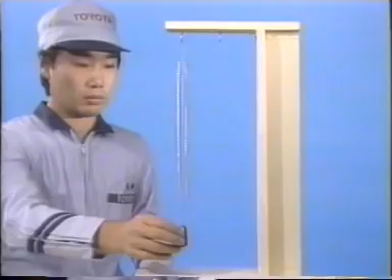In this video, we will learn about the principles of noise and vibration generation and how to troubleshoot NVH problems step by step. We will use simple models to demonstrate the nature of vibration, which just means the rapid oscillation of an elastic solid or fluid. The number of such periodic movements, or cycles, per second is called the frequency. Frequency is expressed by the unit hertz. For example, 1 hertz is equal to 1 cycle per second.

These systems, each consisting of a weight and a spring, are called vibrating systems. Now we will put another lead sinker of the same weight as the first on a second, stronger spring. You will notice that the weight oscillates faster on the stronger spring than on the weaker spring. This time, we will put 2 weights on one spring and 1 weight on the other. Both springs are of the same strength. You will notice that the lighter weight oscillates faster than the heavier weight.

When you compare these vibrating systems, you will find that the frequency of the vibration varies depending on the strength of the spring and the heaviness of the weight. The frequency at which a particular system oscillates or vibrates is called the natural frequency of that system. Now, we will do some experiments using a vibrating system consisting of a spring and a weight and an electric drill. The spring and the weight are now oscillating at the natural frequency of the vibrating system.

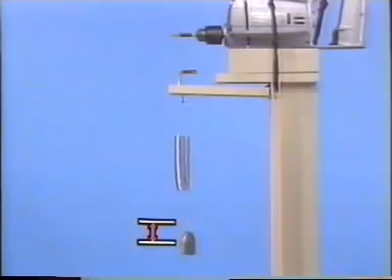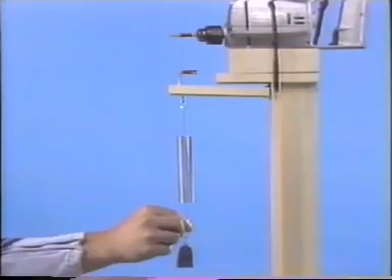Now, let's see what will happen when this drill rotates at a speed that is different from the natural frequency of the weighted spring. You will notice that turning on the drill reduces the amplitude, or size, of the oscillation of the spring. Now, we will increase the speed of the drill until the frequency of the oscillation that it produces reaches the natural frequency of the vibration system. You will notice that the amplitude of the oscillation increases.

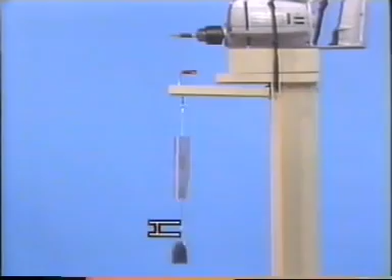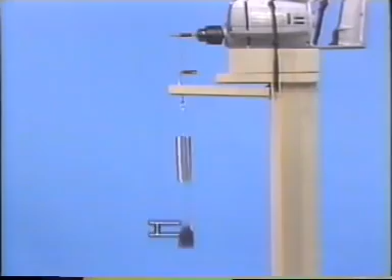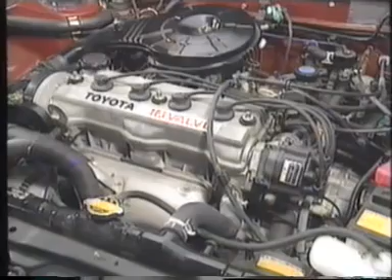When a system is vibrating at its natural frequency and a vibration of the same frequency is added to it, the amplitude of the vibrations becomes larger. This phenomenon is called resonance. The source of a vibration, such as the electric drill in this example, is called a vibrating force. A vehicle has a number of components that can be vibrating forces. We will show you some of them now.

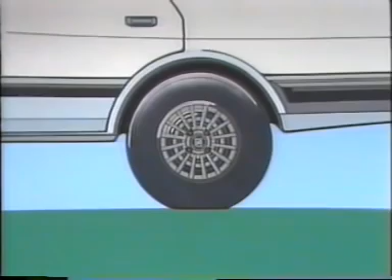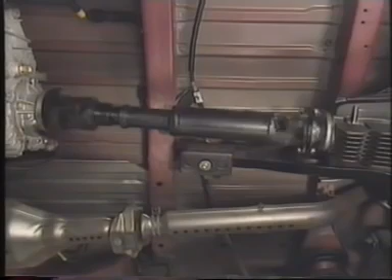When a car is parked in the same place for many days or weeks, there will be a flat spot at the bottom of the tire. This flat spot will cause the wheel to vibrate each time the tire turns. This can, in turn, cause the body of the vehicle to shake. An unbalanced propeller shaft also causes vibration each time it turns. This can cause a droning or humming noise called booming, as well as vibration when the car is running at a high speed.

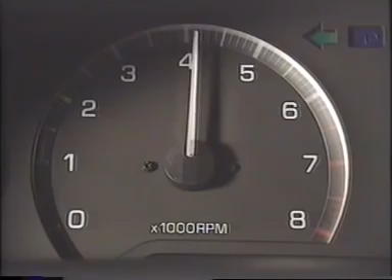The engine, too, is a major source of vibrating force. The torque fluctuations due to combustion in the engine create a vibrating force. This may also cause booming. We will now study the mechanism by which these vibrating forces lead to vibration and noise. For this purpose, we will study how the engine causes booming. The owner of this car complained that booming is heard when the engine is running at about 4,000 RPM.

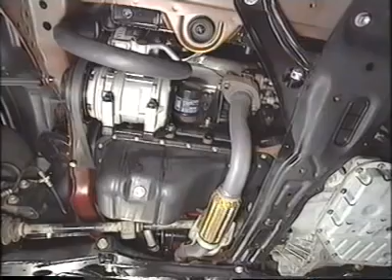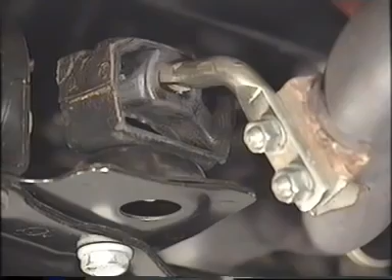The engine vibration causes the exhaust pipe to vibrate. The vibration of the exhaust pipe is transmitted to the body if the exhaust pipe support is not fitted correctly. The body begins to vibrate, causing the air to vibrate also. This vibration is heard in the form of sound or booming by the driver.

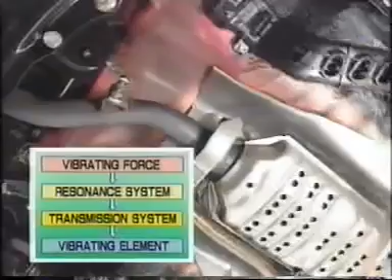Let's sort out the elements of the mechanism of this booming. In this case, the engine vibration is the vibrating force, and the exhaust pipe forms a resonance system. The exhaust pipe support forms a vibration transmission system, and the body is the vibrating element.

The vibrating element causes the air to vibrate, and the vibration of the air is transmitted to the driver's ears as the booming. Sorting out the various elements of a problem is very important for troubleshooting, and you should always analyze problems in this way.

Vibration and noise can be prevented, as we will see next. Generally speaking, vibration can be prevented if you eliminate one of the elements in the mechanism of vibration. If you eliminate the vibrating force, the resonance system, the vibration transmission system, or the vibrating element, you can minimize vibration.

A variety of designs are incorporated into an automobile to prevent or minimize vibration. Let's review some of the designs that are aimed at attenuating the vibrating forces. The vibration of the engine, due to the reciprocating movement of the pistons, for example, is prevented by the use of balance weights on the crankshaft.

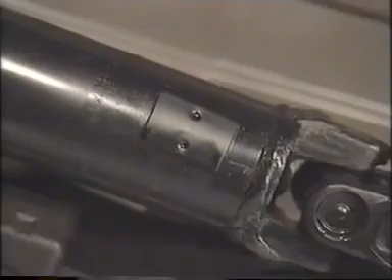The propeller shaft, the tires, and other components that turn at high speeds must also be well balanced. A wheel balancer is used to balance the wheels when new tires are installed. All of these measures are aimed at attenuating the vibrating forces.

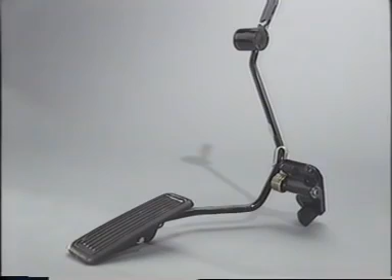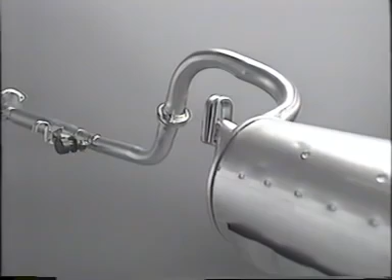A second way vibration can be prevented is by eliminating resonance. A weight is sometimes attached to the accelerator pedal to change its natural frequency in order to prevent resonance. This type of weight, that is, one that is attached directly to a vehicle component, is called a mass damper. When a weight is attached to a component indirectly via a rubber pad or cushion, it is called a dynamic damper.

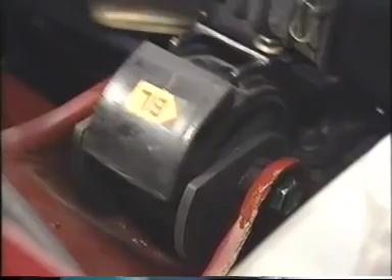The third way to prevent resonance is by modifying the transmission system. For example, rubber or other vibration-suppressing material is inserted between the engine and the body to prevent vibration from being transmitted to the body. Rubber O-rings are also used between the exhaust pipe and the body for the same purpose.

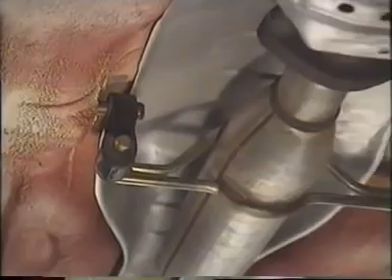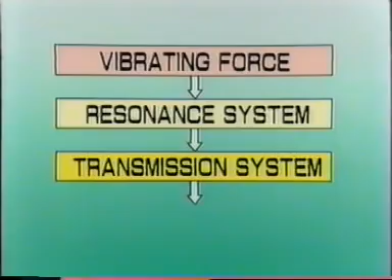The fourth way to prevent vibration concerns the vibrating element itself. For example, the floor is covered with asphalt sheeting, or resin sheets are inserted between steel panels to suppress vibration. These panels are called sandwiched damping panels.

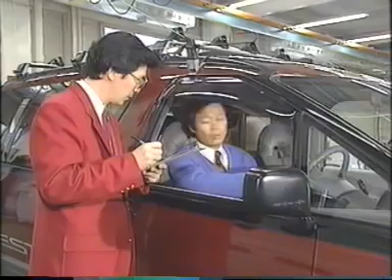As you can see, the principles of vibration are not so difficult to understand after all. Now, based on these principles, we will study how to troubleshoot NVH problems. An important thing in troubleshooting is to forget all your preconceptions about vibration and to listen to and analyze the customer's complaint accurately and objectively. A diagnostic chart may be helpful.

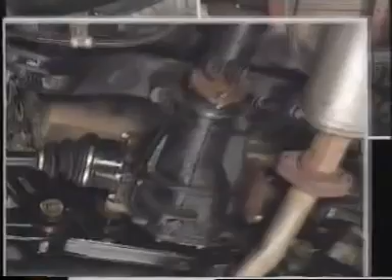If possible, you should also get into the car with the customer, test drive the car, and confirm the problem in some detail. More importantly, you should find out the vehicle speed and engine speed at which the problem occurs, as well as other relevant factors, and identify the characteristics of the vibration and noise as accurately as possible. When you have all the necessary information, it should not be too difficult to identify the source of the vibration.

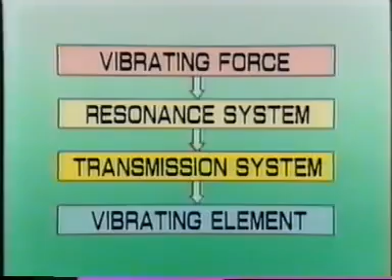In addition, you should sort out all the elements of the mechanism of the vibration and noise and decide which element you need to remove in order to suppress them. We will now study actual troubleshooting using two cases as examples. One of the two cases concerns body shake. The first step of troubleshooting is test driving the car to confirm the phenomenon. You need to know the relationship between the body shake and the vehicle speed.

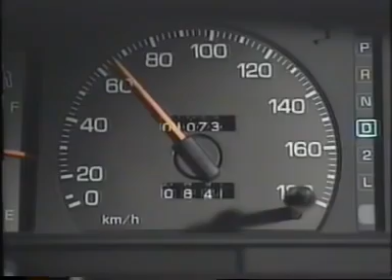In this case, you first begin to notice vibration when the vehicle speed rises to approximately 80 kilometers per hour, and the vibration increases as the speed increases to between 90 and 100 kilometers per hour. You also need to know the relationship between the body shake and the engine load. You accelerate, cruise, and decelerate the car repeatedly, but the vibration seems to be unrelated to the engine load.

The shift lever position and the engine speed often have effects on vibration. In this case, the shift lever position and the engine speed seem to be unrelated to the problem, as the vibration is still felt when you move the shift lever or change the engine speed.

Now, let's summarize all the test results. The test results indicate that the engine load and the engine speed are not related to the problem. The shift lever position is also unrelated to the problem. You can now conclude that the vibration is not caused by the engine or the transmission. So we need to look for some other factors.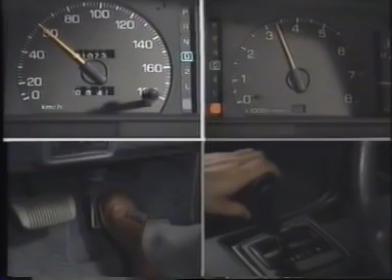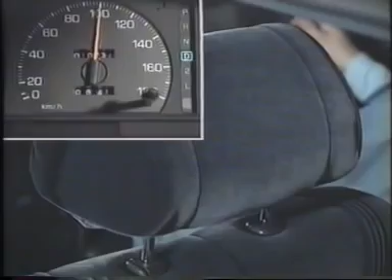We know that the vibration increases as the vehicle speed increases. It appears then that you should suspect a component whose rotational speed increases as the vehicle speed increases. It could be the propeller shaft, the differential ring gear, the drive shafts, or the tires, or some combination of these. The next step is to find out exactly which of these components is responsible for the problem.

There is a good way to identify this component. Since any of these components could generate a vibrating force, let's calculate the frequency for each component at 100 kilometers per hour. We will begin with the tires. The rotational speed of a tire per second is calculated according to this formula.

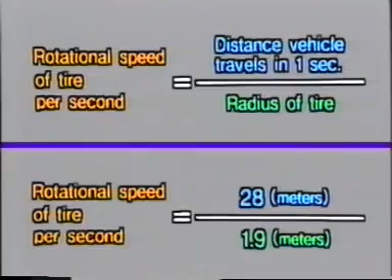When the vehicle is running at 100 kilometers per hour, it travels 28 meters in a second. Assuming that the radius of the tire is 0.3 meters, the tire circumference will be 1.9 meters. Therefore, we can conclude that the tire turns 15 times per second. If a tire has become unbalanced or run out, it will cause a 15 Hertz vibration. The same can be said about the drive shaft or the differential ring gear.

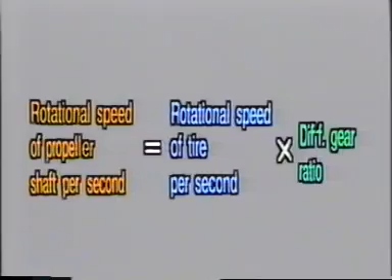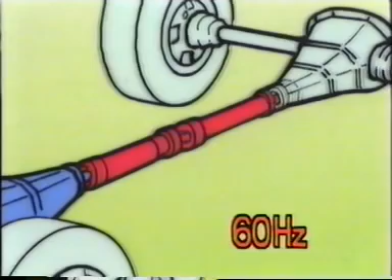What about the propeller shaft then? The rotational speed of the propeller shaft is calculated according to this formula. As you remember, the tire turns 15 times per second in this case. Since this vehicle has a differential gear ratio of 4:1, we can draw the conclusion that the propeller shaft turns about 60 times per second. For this reason, if the propeller shaft is unbalanced, it will cause a vibration at the frequency of 60 Hertz.

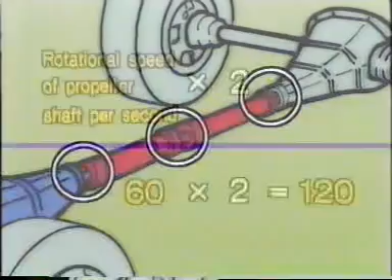In addition, if the propeller shaft has an excessively large joint angle, it will cause 2 excessively large torque changes per rotation. This will cause vibration at a frequency of 120 Hertz, or twice that of the propeller shaft. As you will realize by now, you can identify the vibrating force if you know the frequency of the vibration about which the customer is complaining.

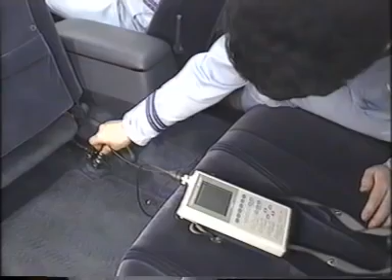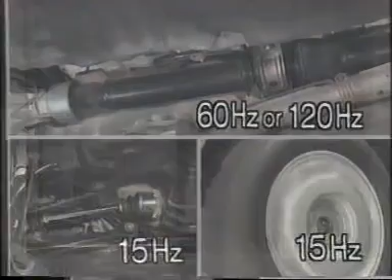A vibration frequency analyzer is used to measure the frequency of a vibration. A vibration frequency analyzer has a pickup probe which is attached to the vibrating part in question. The frequency of the vibration is indicated on the analyzer. You can read the measurement by moving the cursor on the screen. In this case, the frequency reading is 15 Hertz. This indicates that the vibrating force is generated by the tires, or by other components that are turning at the same speed as the tires.

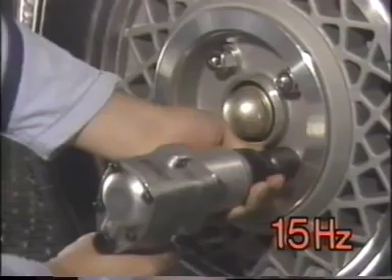If a vibration frequency analyzer is not available, there are other methods that you can use to estimate the parameters of a vibration. All you need is your hand and an intuitive knowledge about the most commonly occurring frequencies. For instance, this component is vibrating at a frequency of 15 Hertz. If you touch it with a screwdriver, you can hear and feel it quite easily. An impact wrench generates vibrations of a similar frequency.

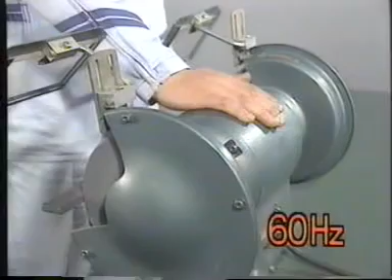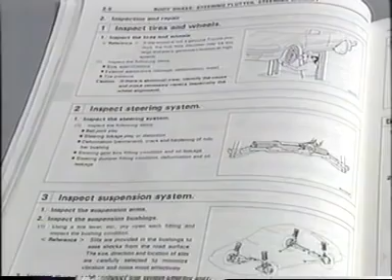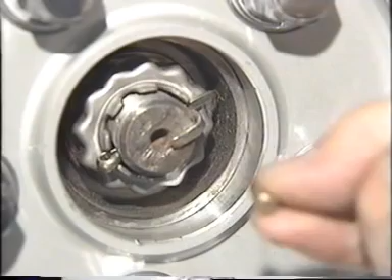Now, we will return to troubleshooting the problem of vibration at 15 Hertz. We will start with inspecting the tires, because tires often cause body shake at high speeds. We will refer to the NVH diagnosis manual as we inspect the tires. Before we begin the inspection of the tires, we must check the tires and wheels visually, the steering linkage, the suspension system, and other related components. If everything is normal, we check the clearance between each hub and wheel. The standard clearance is less than 0.1 millimeter. This wheel seems okay.

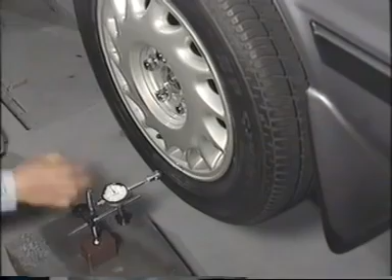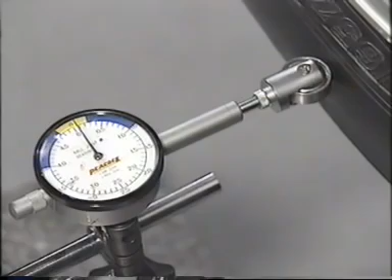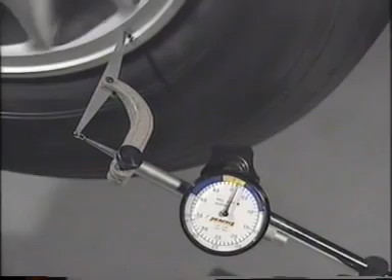We will check the tire runout next. Before doing this, be sure to drive the car for about 15 minutes to eliminate the effects of any flat spots. The maximum allowable lateral runout is 1.2 millimeters. This tire seems okay. Let's check the radial runout next. The maximum allowable radial runout is 1.0 millimeters, but the reading here is much larger than that. This could be the cause of the vibration. Let's check the radial runout of the wheel also. The wheel runout is not zero, but it is within specification.

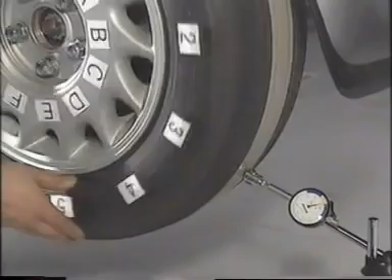In a case like this, the radial runout can be corrected by conducting phase matching between the tire and the wheel. If you move the thickest part of the tire to the point where the center of the wheel is closest to the rim, the radial runout will be reduced. This procedure is called phase matching. As you can see, the runout has been reduced. To phase match the tire and wheel, we divide the tire into 12 equal divisions like this. Then, before starting the measurement, set the dial gauge to 0 at location 12. Next, record the amount of runout at each point.

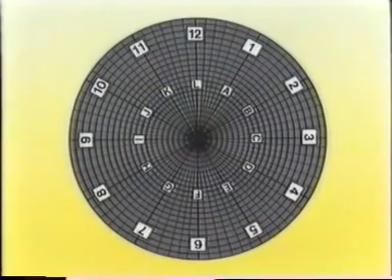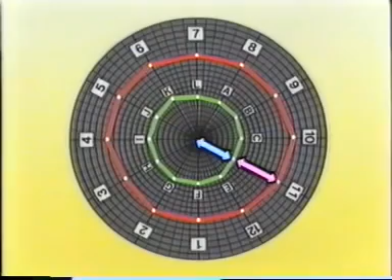The result will look something like this. The outer line indicates the radial runout of the tire, and the inner line indicates the radial runout of the wheel. As we said before, if you move the thickest part of the tire to the point where the center of the wheel is closest to the rim, the radial runout will be reduced. Let's check the results of the phase matching. The measurement now reads well below the standard value of 1.0 millimeters. You need to do a similar check for all of the other tires.

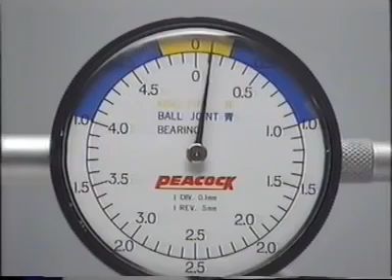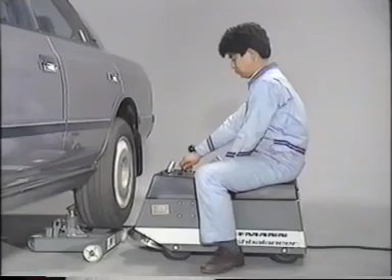Wheel balance is also an important component of the vibration that occurs in automobiles. So before taking the car on a final test drive, be sure to check the wheel balance on both an off-the-car balancer and an on-the-car balancer.

The second case of troubleshooting that we will look at is booming, which is, as you will remember, a droning sound that is very unpleasant to the ear. The first step is test driving the vehicle as you did when troubleshooting body shake. As a result of the test drive, we find that only the vehicle speed is related to the noise.

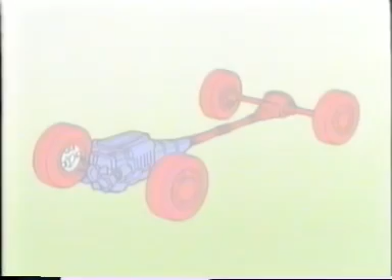Also, we find that the noise is first heard at a speed of 80 kilometers per hour, and that it reaches its peak at a speed of 90 kilometers per hour. These findings seem to indicate that the noise is caused not by the engine or the transmission, but by components whose speed varies directly with vehicle speed. The next step is to calculate the frequency of the vibration of individual components at a vehicle speed of 90 kilometers per hour when the noise is most noticeable.

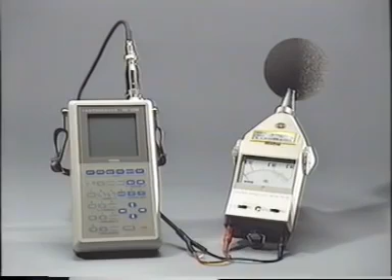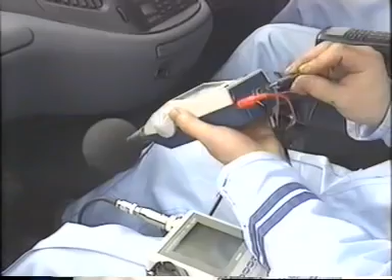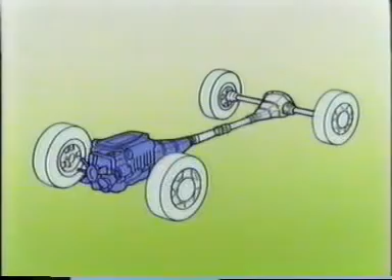Now we will measure the frequency of the booming using a sound meter and a frequency analyzer. The sound meter and the frequency analyzer are connected like this. According to the analyzer, the frequency of the noise is 60 hertz. This frequency corresponds to the frequency at which the propeller shaft will probably vibrate if it is unbalanced or run out. This indicates that you should suspect the propeller shaft more than anything else.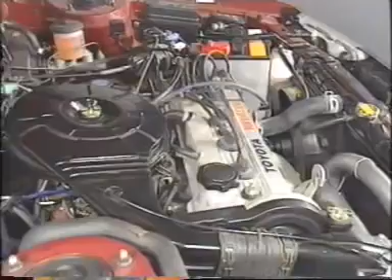You may not have a sound meter or frequency analyzer at hand, but you can always use your own ears after some training. For example, the frequency of this sound is 60 hertz. It is similar to the booming in question. A sound of the same or similar frequency is also heard from a bench grinder. This is a sound whose frequency is 120 hertz, or twice that of the previous case. A sound of a similar frequency is produced by a cooling fan motor. The booming produced by the engine sometimes has a similar frequency also.

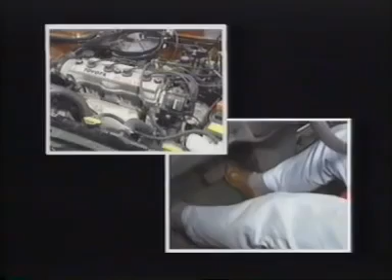As the frequency increases to 1 kilohertz, you will hear a sound like this. A sound of similar frequency is heard, for example, along with the test pattern on a TV screen before and after the day's broadcasting. Transmission or gear noise sometimes causes a similar sound also. If you train your ears by listening to sounds of different known frequencies, you will be able to differentiate frequencies without the help of an analyzer.

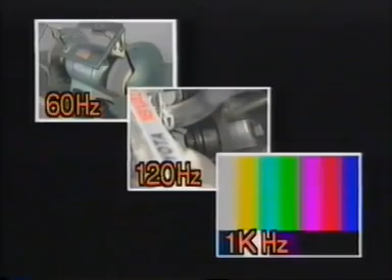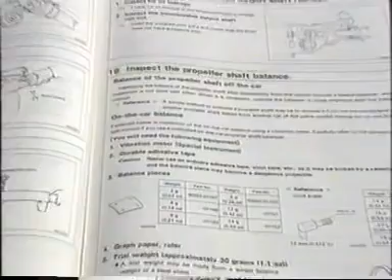We will now return to the case of the booming about which the customer complained. It appears that the noise is caused by something that rotates at the same speed as the propeller shaft. Or perhaps it is caused by the propeller shaft itself. We will check the balance of the propeller shaft, as it seems the most likely cause of the vibration. Please look in the NVH diagnosis manual to find the detailed inspection method to be used. Here we will only show the main techniques used in the propeller shaft balance inspection. Actually, there are 3 methods that can be used to check the balance on the car. First, we will check the balance using a vibration analyzer and some trial weights.

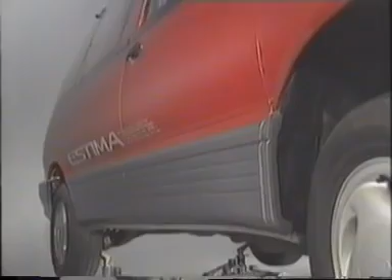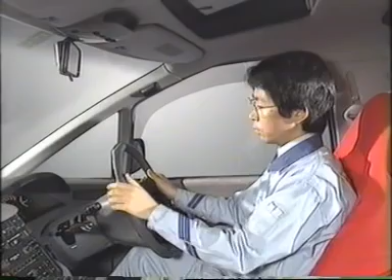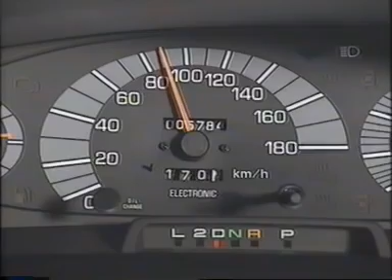Before you can begin the inspection, you need to jack up the vehicle, check the installation of the propeller shaft, and check the surface of the shaft for damage. Then, put 4 marks, 90 degrees apart from each other, on the propeller shaft like this. Now attach the pickup probe of the vibration frequency analyzer here. This inspection requires 2 persons. One person stays inside the car and operates the engine to reproduce the complaint. When the booming is heard, this person sounds the horn to signal the other person. When the second person hears the horn, he checks the vibration level reading on the frequency analyzer. The reading is 0.17 in this case.

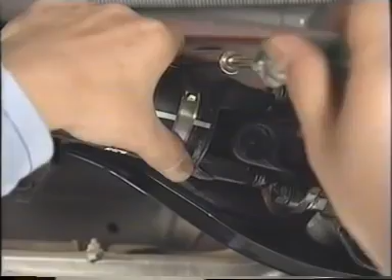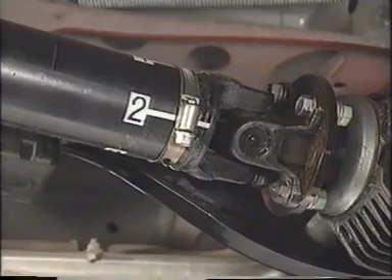Now put a trial weight onto the propeller shaft where it is marked number 1. You may use a hose clamp as a trial weight. The screw of the clamp serves as the trial weight. The weight of this screw is 17 grams. We will measure the vibration again with the trial weight attached. We must repeat the measurement at all 4 points. Next, we draw a graph using the measurement data. The length of each arrow corresponds to the vibration level at each point as indicated on the analyzer. Now we draw bisecting lines perpendicular to the arrows from 1 to 3 and from 2 to 4 and determine the intersection point.

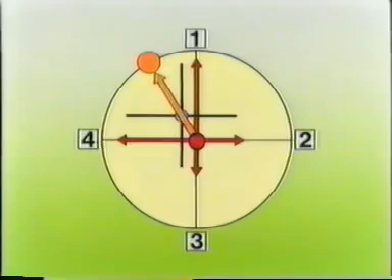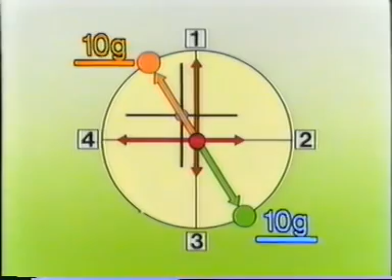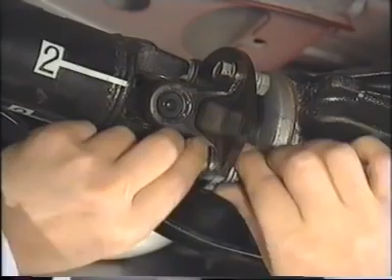The propeller shaft balance may be checked by other methods also. It can be determined by a feeling test as you move a trial weight from one point to another. Or it can be determined using a propeller shaft balancer. You will find more details about this method in the NVH diagnosis manual. The imbalance may be corrected by using balance pieces and weighted bolts like these. Now the repair is complete. The car is now ready for a test drive.